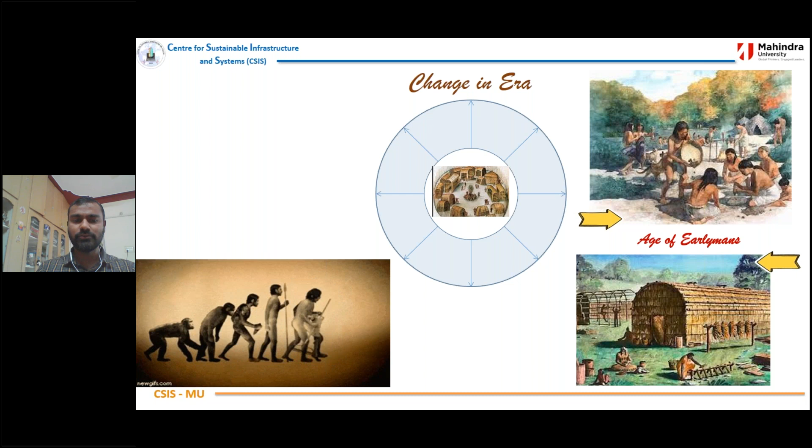It all started from the early man, where people moved from place to place to get their food, called nomadic life. Suddenly they started to live in caves wherever there was a natural formation of houses. But over the period of time, they stopped the nomadic life and settled in one place. That's where civil engineering has come into the picture.

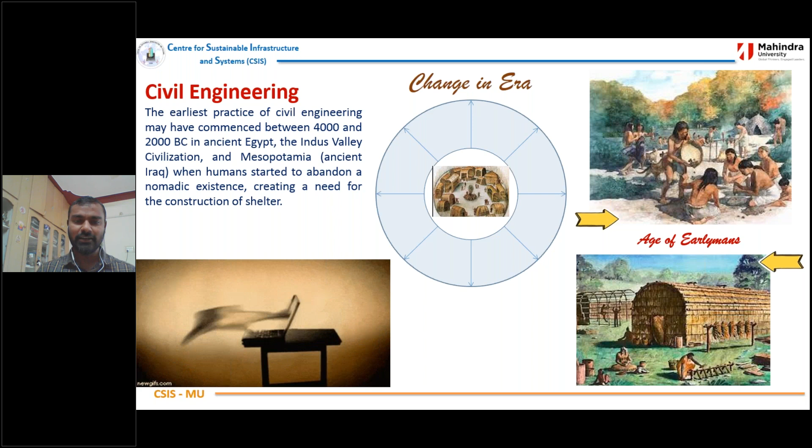The earliest practice of civil engineering may have commenced between 4000 and 2000 BC in ancient Egypt, which is more than 6000 years from now. There were certain civilizations like Egypt, Indus, and Mesopotamia, where people abandoned nomadic life and started settling down, even building their communities. That's where the whole of civil engineering started, when they began to build something for their life.

The history of civil engineering is a mirror of the history of human beings on this earth. The engineering shows exactly how human beings have evolved over the period of time. This is a couple of engineering examples used thousands of years back.

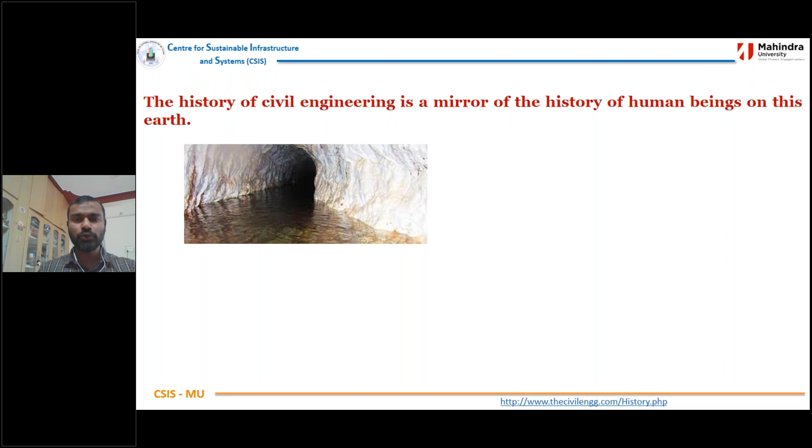This is called the Qanat water management system, seen in Persia, Iran, Iraq, where there is a scarcity of water. They dug a tunnel horizontally, as you see in the image, and then had wells vertically down—a horizontal tunnel which has water in it, and vertical wells used for removing the water. This was used way back, 3000 BC. The length of this Qanat water management system is approximately 70 kilometers, maybe more. This is not the only place where they found this system, but a couple of other places as well.

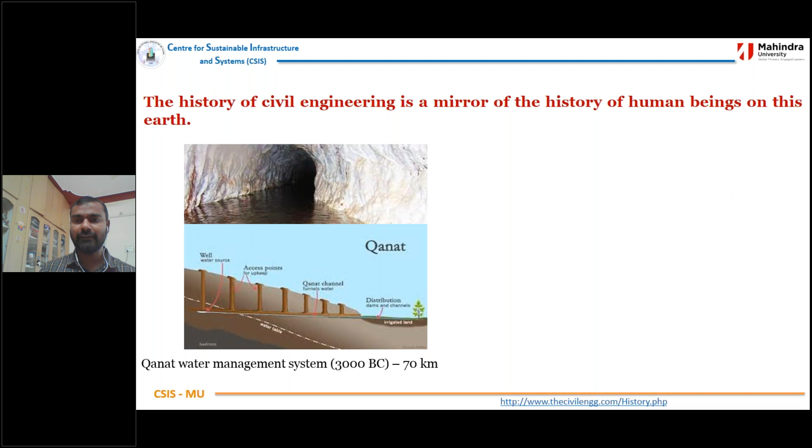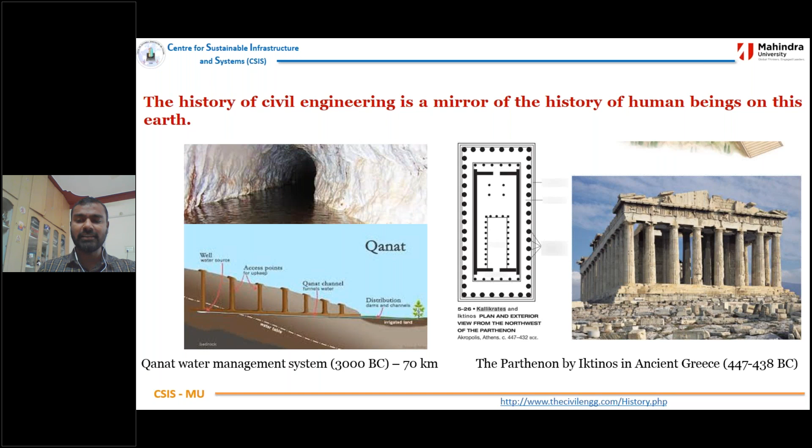And then the Parthenon, it's in ancient Greece. What we see is columns and beams and architecture, and mammoth structures all making a huge structure, with the locking mechanism and everything. This talks about simple physics, gravity, and the designs and stability of the structure.

That has largely been used and seen in Greece in mammoth structures. Coming to 312 BC, Roman engineers also used pathways like this, stone blocks laid for a pathway, and these stone blocks of pathway are even seen today, showing their longer life. Like the Indus civilization, said to be one of the first civilizations to have a brick pathway, Roman civil engineers had this rock pathway. They had longer durability in age, especially the stone structures.

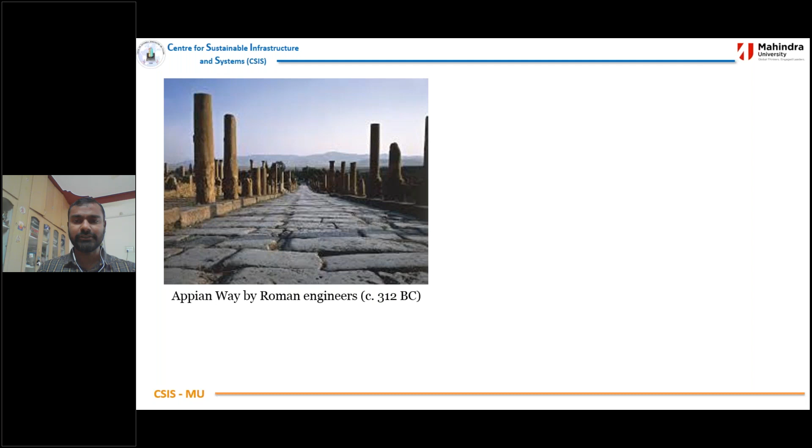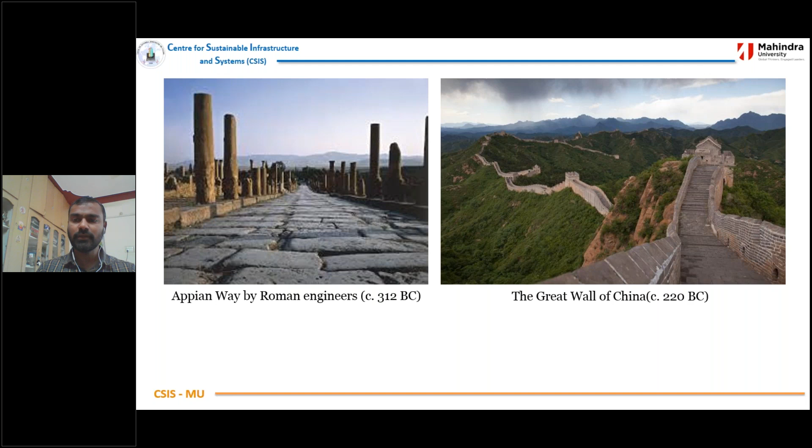And then the Great Wall of China, from 220 BC. This is one of the longest walls, built with bricks and stones, and they also used lime and gypsum as a binding material between the walls. If you see the clear picture, at the bottom part we can see the binding material, which is not cement but is like cement—gypsum and lime, which are very natural.

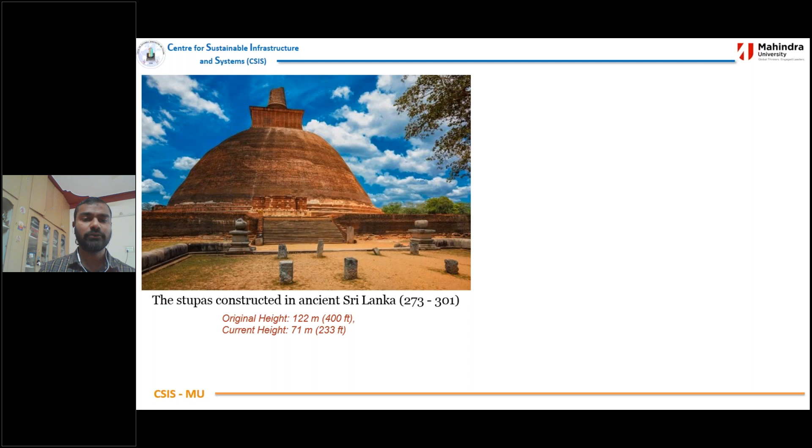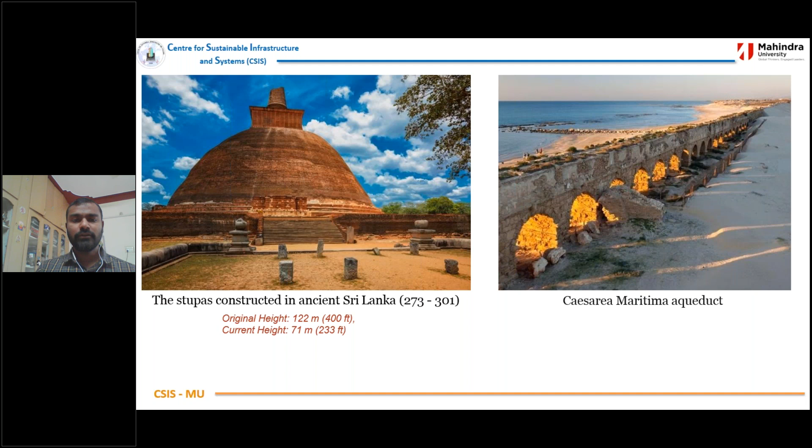And then this is an aqueduct. Aqueducts for water control, either from oceans or rivers, were used in the Roman civilization during the Caesar era. So what I am trying to tell you is how this engineering has developed in building mammoth structures, and how they actually used water systems.

These were largely two things discussed in the past few slides, and this picture talks about Machu Picchu in Peru, built in 1450. This talks about the development of a society at the topmost part of a hill. It's said this is the Inca Empire, also built in the Andes Mountains.

One of the best parts of this society and civilization was that it had indigenous water sources. Water was used, and they had perennial water all year round, even though they were on top—one of the best parts. They had one of the best systems for building houses and their kingdom with stones and other natural materials, and they also used wood. Second, they had the best water management system.

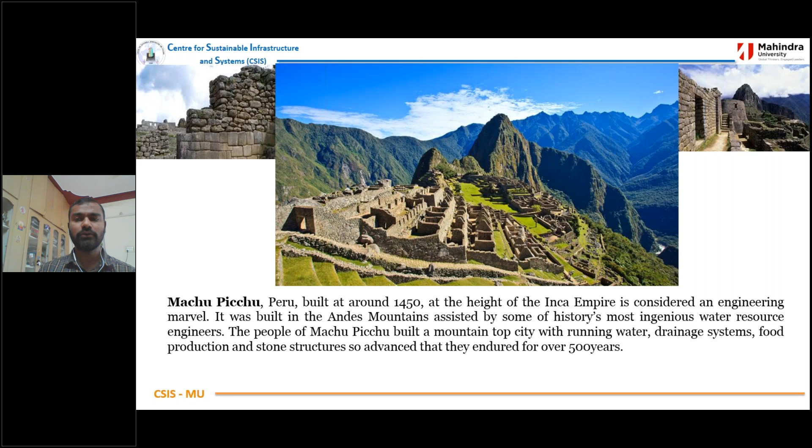In Machu Picchu, apart from drinking water, they also had a sewage line, which shows they understood how to treat the waste released by the society. This is the building of society. So these two pictures show us how the basement and the top part using stones were used to build structures. And of course, we also classify these ages into bronze and silver.

If we see the clear picture in this slide, they talk about very natural materials used for construction. In some places, the first picture shows dry grass and mud used for construction on the top left; the middle shows leaves and wood for construction; and the right corner shows slightly more advanced treated wood and a little glass. The bottom part shows houses built with mud, complete wood, and stones.

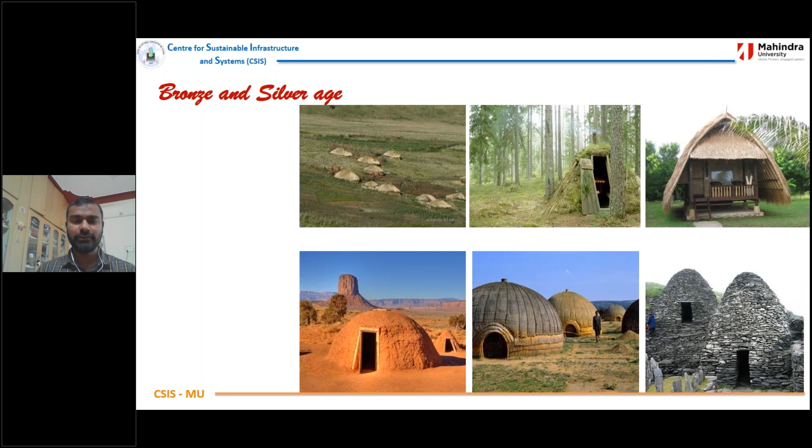All these are based especially on local materials, which today are largely called sustainable materials, and they don't release any kind of pollution, whether air, water, or earthen. These are the three pollutions we check even today—so there is no air pollution, no water pollution, and no earthen pollution for this. This is based on the Bronze Age solution.

And then we have Mayan, Egyptian, and Roman civilizations. You can see the Egyptian pyramids, one of the most stable structures in geometry, along with Mayan civilization and Roman civilization. What can be observed in this slide is that the designs are very unique in their own way.

Few are pyramidal in shape, circular in shape, then tapered in shape. So they all are very different in their nature, which actually says that geographically, these civilizations have evolved based on their local environment, geographical reasons, and natural materials, which has given an evolution of geometries.

And all these geometries actually withstood natural calamities like earthquakes, floods, and anything, apart from human disasters like war. And then there's a skill.

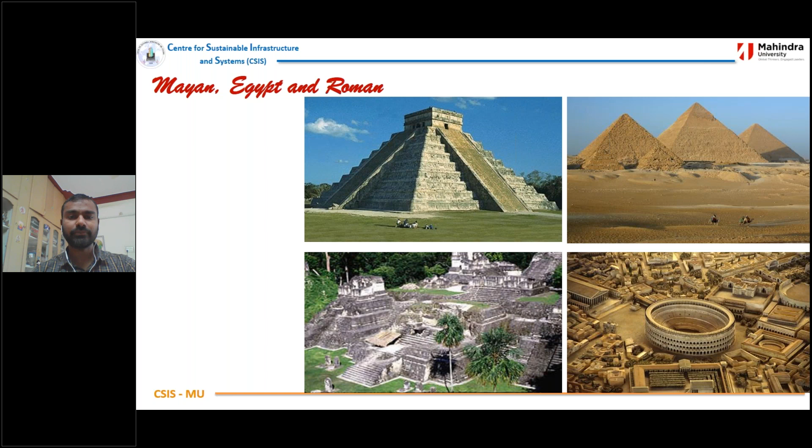We can see very precise skill of religious places like temples. We can see stones placed in locking mechanism, and we can also see temples built with one stone. There are various kinds of structures which were built, showing a marvelous skill in their engineering.

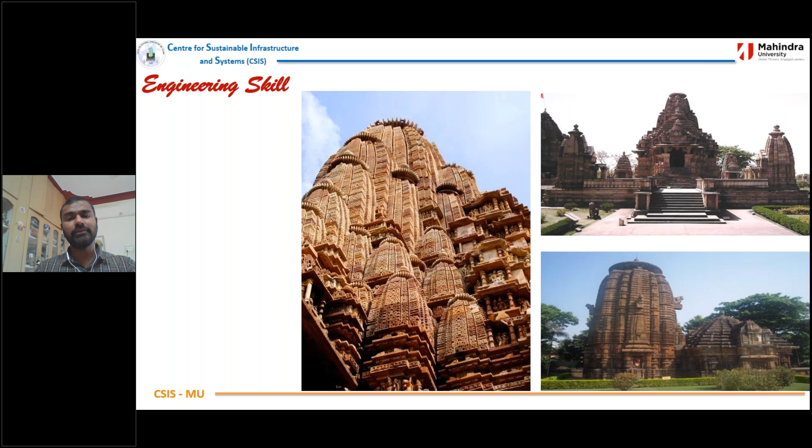This geometry is not just evolved like that, but it also speaks about the stability of these structures. As we see, the shape decreases or tapers as it goes up, and this can withstand floods, as well as even wind and earthquake. So these structures had geometry, stability, and resistance toward other natural disasters.

For most of us, history is still a secret, and we are still trying to see what is the mystery behind a lot of historical structures. It's not exactly a secret, but it's an open secret. Most people know that there was a contradiction between religion and science, and people were executed, so the secrets were kept in another form.

So when there was a difference between science and religion, all the information was kept in the form of a portrait, largely built with mechanics, also as a treasure of something. So when I read about the history of mechanics, I did read about Leonardo da Vinci. He portrayed certain images consisting of simple mechanics for constructing very large, mammoth structures.

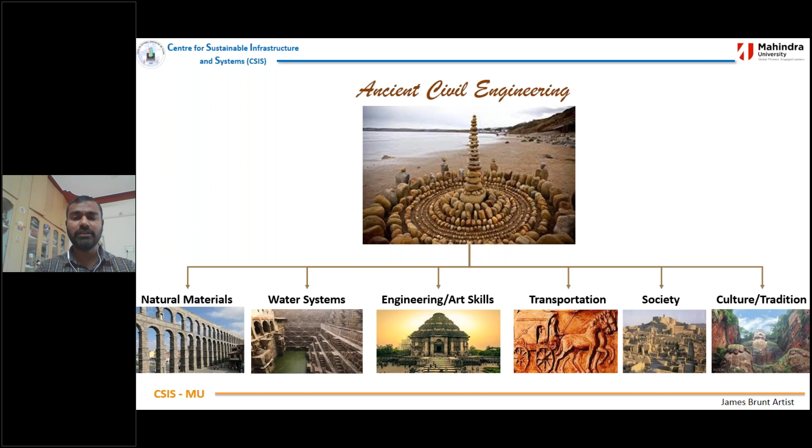And the last point is that all these structures show some kind of culture or tradition in them. So this is what ancient civil engineering is, and if you can see, all of this actually relates to modern civil engineering as well. The current civil engineering, which I'll talk about, is all about space — how to utilize space.

Air is all about how you take care of wind forces, or how structures are designed for wind circulation. Fire is nothing but heat control in structures, and then there's water and earth.

So for modern civil engineering, if anybody types it into Google, there's a simple definition: in modern usage, civil engineering is a broad field of engineering that deals with planning, construction, and maintenance. These three are very important — planning, construction, and maintenance of fixed structures or public works, which are largely government structures.

As they are related to earth, water, or civilization and their processes, civil engineering talks about planning, construction, maintenance, and all about the five elements, and how they are integrated to come up with fixed or public structures.

Civil engineers are always working in shaping the world as we live today. The whole world structure is largely believed to be designed by architects and civil engineers, though this is changing a little now. Examples include building roads, railways, bridges, canals, skyscrapers, factories, etc. These days, modern civil engineering is also focusing on aesthetic and environmental impact, which is where the term sustainability engineering comes in.

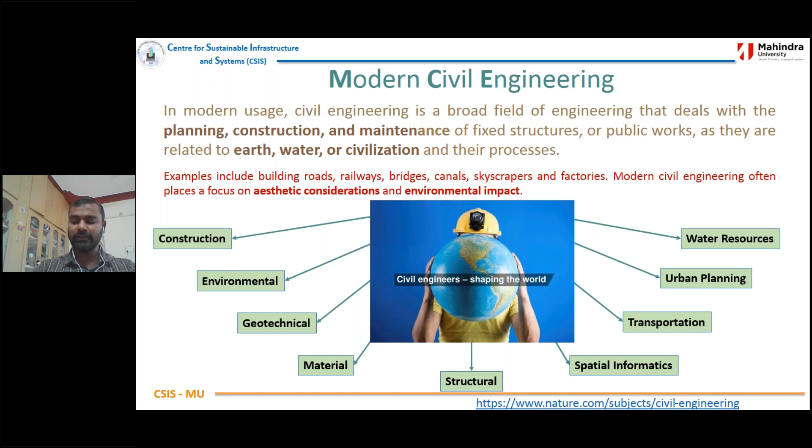If you're traveling from Hyderabad airport into the city via the outer ring road, you can see a number of vertical cranes working on multi-storied structures, ranging from 15 stories to almost 40-50 story structures. At least hundreds of cranes are working along that road building these tall structures. These cranes have actually changed the fate of the skyline of the city itself, making work easier and faster.

This is the crane, and second, this is construction in China. A very similar equipment was also used in L&T Hyderabad for moving a girder from one pier to another—you can see the movement of the girder using a huge mechanical equipment vehicle. This has made the construction of bridges much easier. It works on a cantilever concept, if you know what a cantilever is in civil engineering, and this makes the work faster.

Unlike previously, where we used a lot of scaffolding and shuttering, a lot of groundwork can now be avoided with this larger equipment. But it has to be done very carefully, because a single accident can cause a huge disaster.

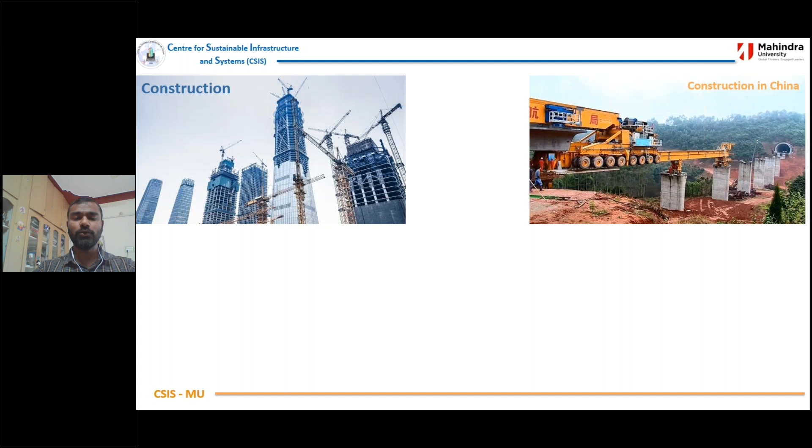This is the Millau Bridge in France, which can withstand very harsh environments. One reason I included this bridge is that it represents modern-day bridges—it's one of the tallest, and the material used is so substantial. They've used lots of tons of steel and concrete so that it resists extreme weather, including snow and high temperatures. It's one of the tallest bridges seen in France.

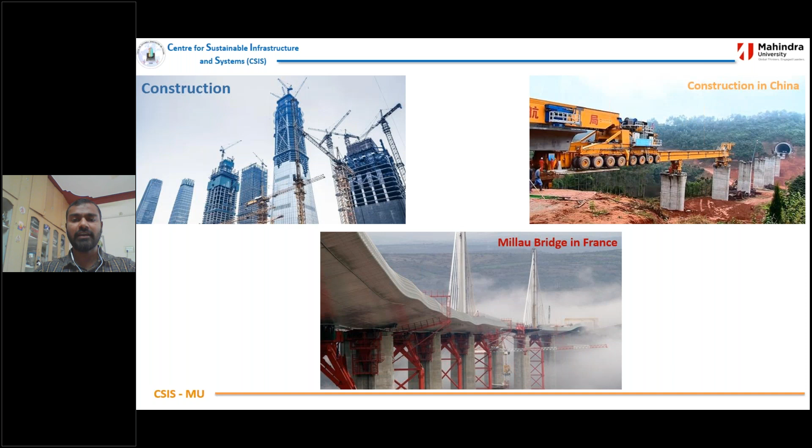In continuation, this is the Chenab Bridge, which Indian Northern Railway is building—in fact, it's almost done. It's the world's highest rail bridge, built by Indian Railways to connect Kashmir to the rest of India by 2021. Very recently, we attended a seminar at the National Academy of Construction where they said the bridge is almost done. It will decrease the transportation journey by about 300 to 326 kilometers, and the total length of the bridge is 1.3 kilometers.

This is the tallest bridge, with a height of 359 meters. In terms of material, it uses 25,000 metric tons of steel—that's really huge—and it has to withstand a wind velocity of 220 kilometers per hour. When Hyderabad had winds of 150 kilometers per hour, we saw a lot of billboard and advertisement board failures. So 220 kilometers per hour is very, very high. Of course, there's a speed limit allowing 100 kilometers per hour, even though it's designed for 120 to 140 kilometers per hour.

So this is the Chenab Bridge. When we compare it to the Eiffel Tower, one of the tallest steel towers in the world at 324 meters, this bridge stands at 359 meters, making it one of the tallest bridges in the world. This is during its construction—they faced a lot of challenges while building it. It was not an easy task, but it's almost a done bridge now.

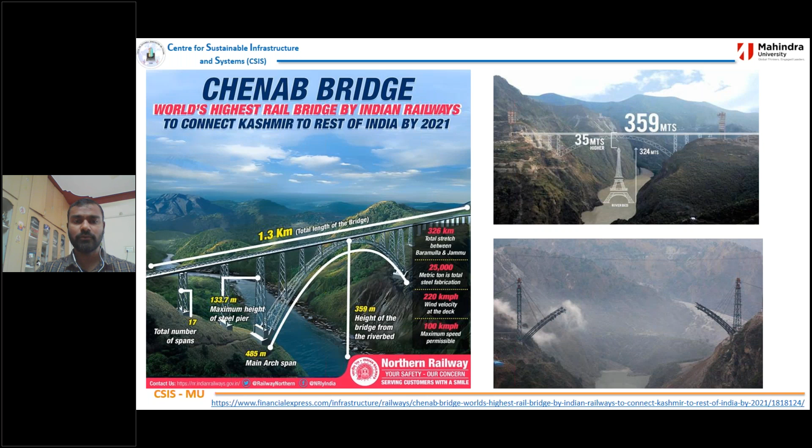And then environmental engineering or environmental sciences. Even though we have developed in multiple fields and multiple dimensions of engineering and sciences, we still face one of the biggest problems, environmental pollution. Right now, I would like to limit my presentation only to the civil engineering perspective.

There is an article in the Guardian last year which says concrete is the most destructive material on earth, even though there was a previous article in 2017 that said concrete is the most versatile and usable material for construction. In 2019, this has actually become a destructive material. Why has that happened?

We all know any material which is used for a limited purpose, up to a certain limit, is absolutely fine, like plastic. Once it starts crossing the threshold, it causes a lot of environmental pollution. Now concrete has become that. The concrete industry and usage of concrete has been releasing a lot of carbon dioxide into the environment, causing global environmental pollution, which has made this a very big issue to consider.

Of course, people are coming up with solutions like green structures or green buildings. I would like to talk about that in the last slide of this presentation, where I'll discuss green buildings or advanced buildings. So environmental engineering is one area. Environment does not only restrict itself to air, but also consists of earth, water, and sound pollution as well. All these are read about in today's engineering.

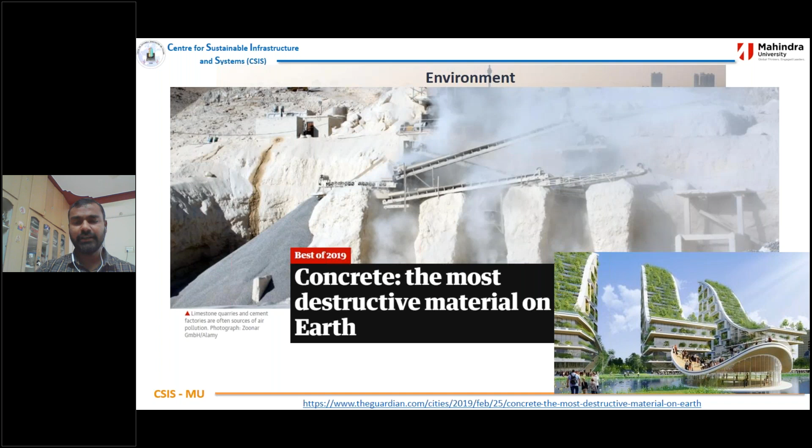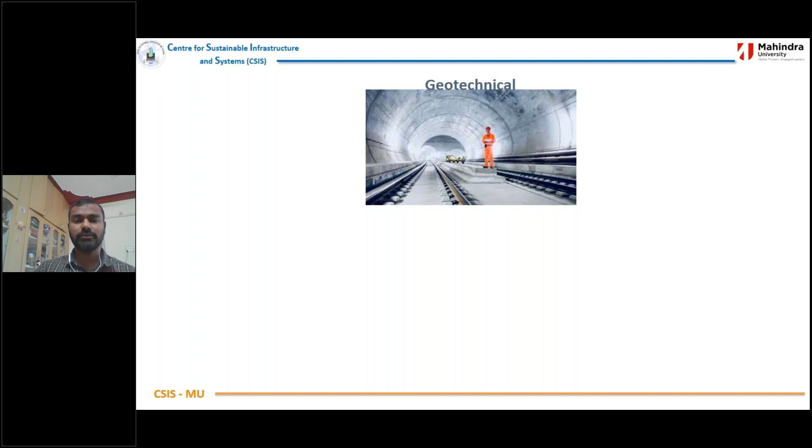And then with diamond cutters, the things are much faster. Simultaneously, we can cut the tunnel and also make the concrete lining on the tunnel, making it one of the much faster tunneling systems in the world.

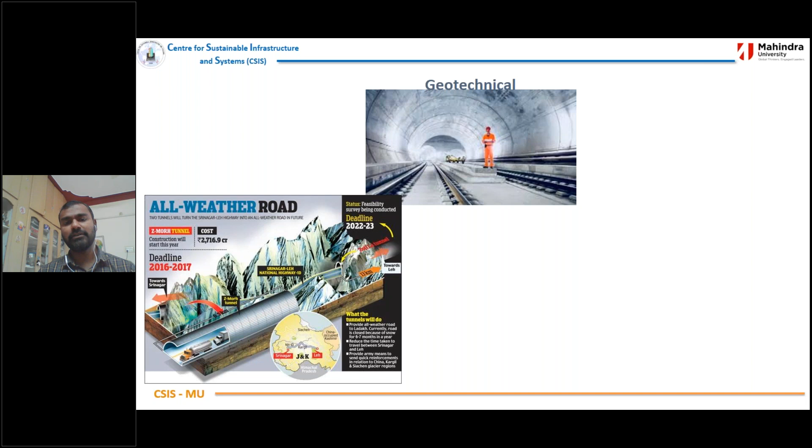This is one of the tunnels being laid in Jammu and Kashmir, connecting Leh and Srinagar, which is about to open in 2022. Things have started to move, and whatever current engineering practices are there have made civil engineering works much faster, precise, and a little more robust. And then this is soil stability.

Even though it looks like a very small area, slope failures have become one of the bigger problems, especially on hilly terrains. If you talk about India, then its northern part or northeastern part have slope failures. In fact, there were slope failures two days back because of the floods.

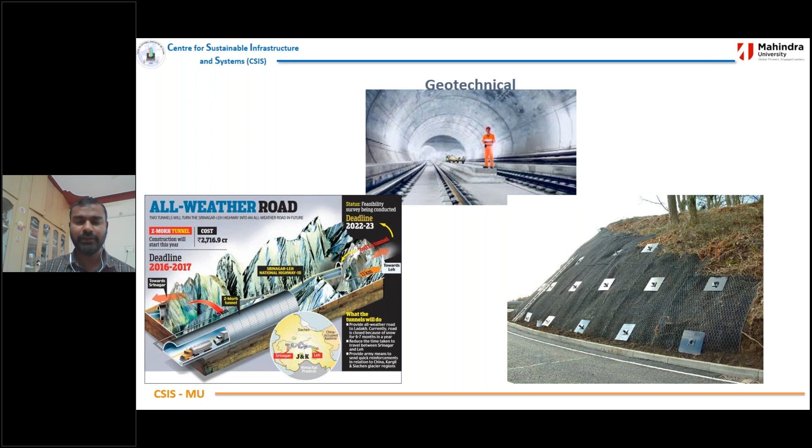The floods actually weaken the soil and cause slope failures, and this happened in Meghalaya near the Shillong region. Of course, there were no fatalities, but it is assumed to be one of the large landslides and slopes that has occurred after a few years.

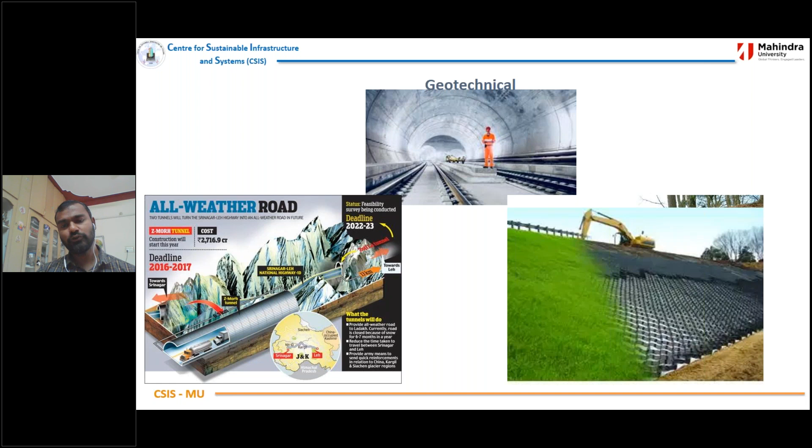And then these slopes, with current technology using fiber and geosynthetics, are being converted into greenery by providing hexagon-shaped synthetics and then having grass grow on it. So geotechnical engineering has also gone a lot farther in this area.

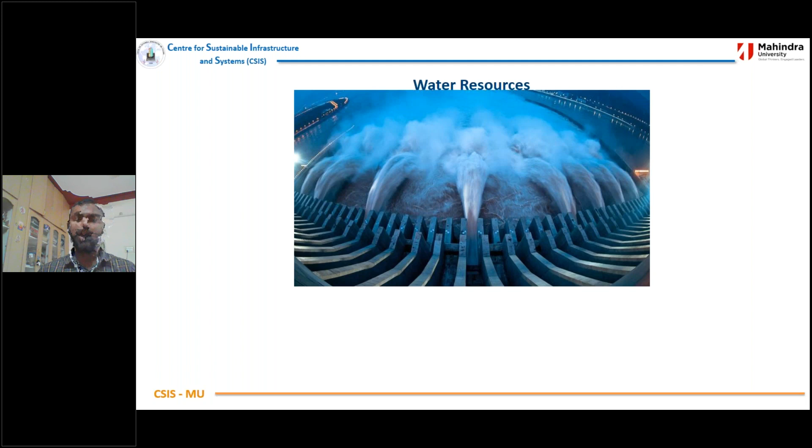Water resources, for me, is about where we can get water, how do we store this water, and how do we use this water. So water resources and fluid mechanics - everything we try to understand about how we get water, how we use water effectively, and whether we are actually trying to treat water.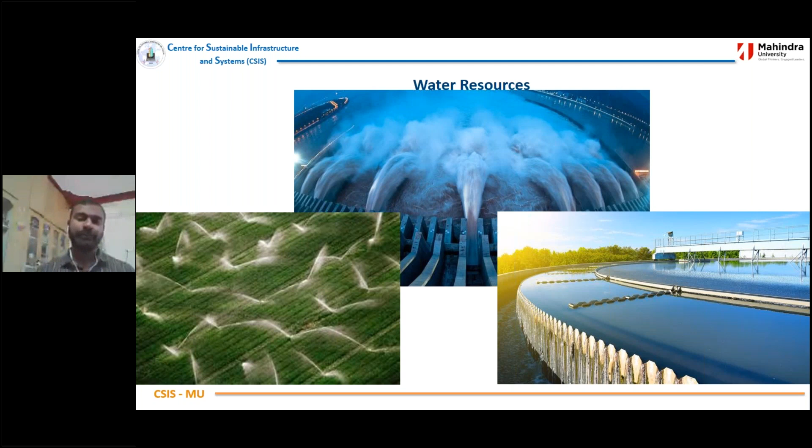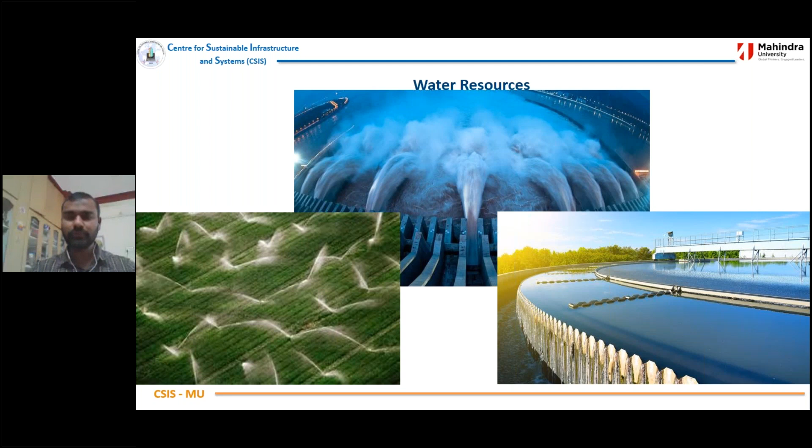And then spatial informatics - this is also an area we are improving. Once spatial informatics came into the picture of civil engineering, a lot of things changed. Now we see the city in terms of layers.

Apart from that, this is also helping in today's cabs.

GPS uses the global positioning system to find your location. It'll exactly give you the time of reach from your starting point to your destination. This is spatial informatics in engineering.

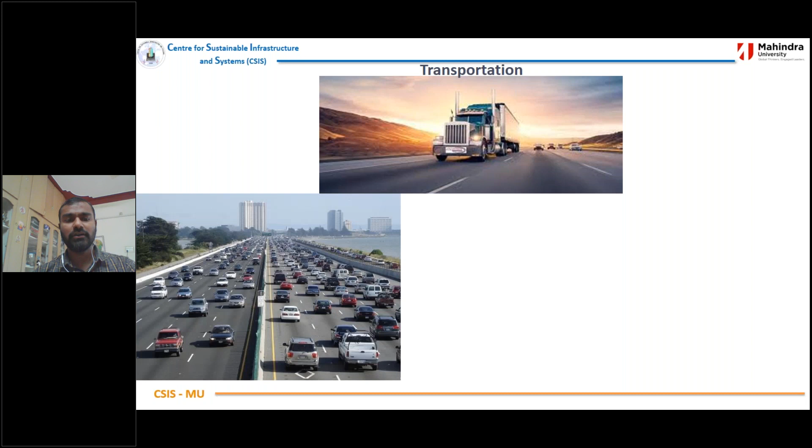And transportation, of course, all around the world we've been very successful in building one of the broadest roads the world has ever seen, and also one of the most complicated interchanges in the world. This is Singapore's interchange. Similarly, there are a lot of interchanges all around the world. Very few, like Hong Kong, Japan, Singapore, and Mumbai, have such complicated interchanges.

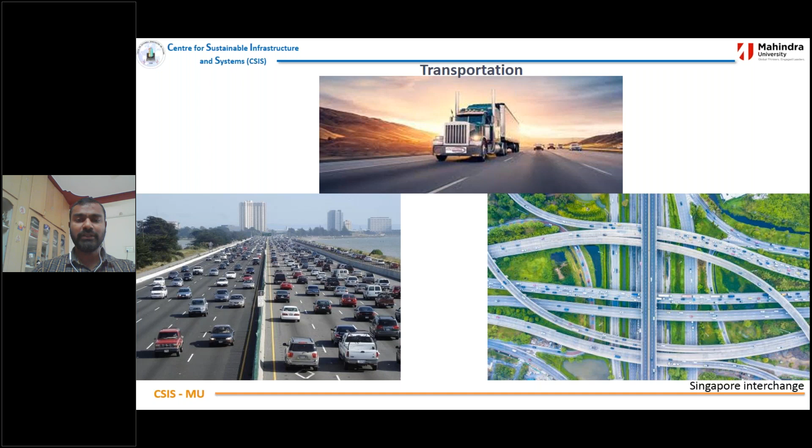Symbols and signals help us in reaching the destination, but when we miss one, it takes kilometers of road. But then, yes, we have the big transport system.

Urban planning - this is Barcelona's car-free superblocks, where there are series of houses. This is one of the ways urban planning is how we are replanning the growth and control of cities. It's still a challenge these days.

This is called gated communities. This picture is taken from Hyderabad. Gated communities are societies with a capacity of 3,000 to 25,000 people. We even have bigger communities of 1 lakh, where we try to manage everything inside the community. So smaller communities mean better management with this tag. Communities are trying to build these gated communities for better management.

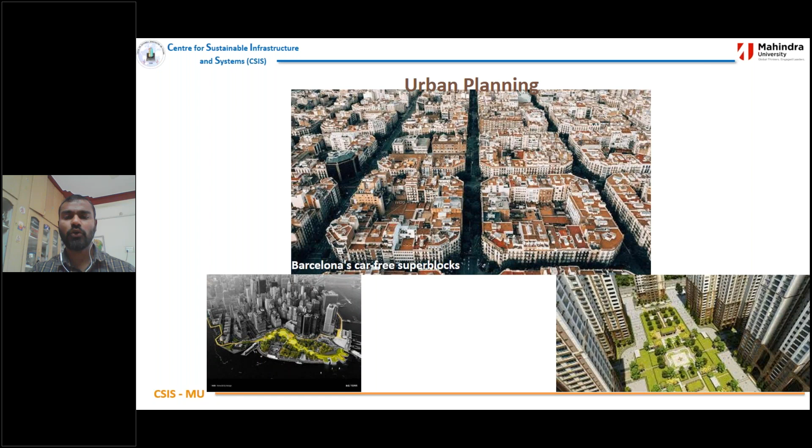But still we have certain things. This is the left side - what you see is how do we manage water in these communities, or how do we manage water in the growing cities? That's still a big challenge for us. And then, what is lacking? This picture is only for small awareness, and I'll add answers to these pictures.

Even though we have the broader roads, there's still a bigger problem of traffic congestion. We have the best education system, but yet we have traffic congestion. Why is this? That's the question mark.

And then it makes things even worse when we have floods. In fact, just a couple of days back we could see a lot of floods all over India. And then, even during the pandemic, there's still a lot of congestion on the roads. This makes it really a disaster.

Even this is not only in developing countries, it is also in developed countries. You can see how the traffic is being managed - there's no systematic order in this traffic. It's going to take hours, from morning till evening, until this traffic congestion gets cleared up. So there's still a problem in it. Even though modernly we have all kinds of engineering and the best of technology, we still lack these things.

Now this is a very big U-turn, as you can see in the right side picture. You can just guess how much time it's going to take when all these vehicles move up a U-turn while the other lane comes in straight. So these things are still promising challenges for current civil engineers.

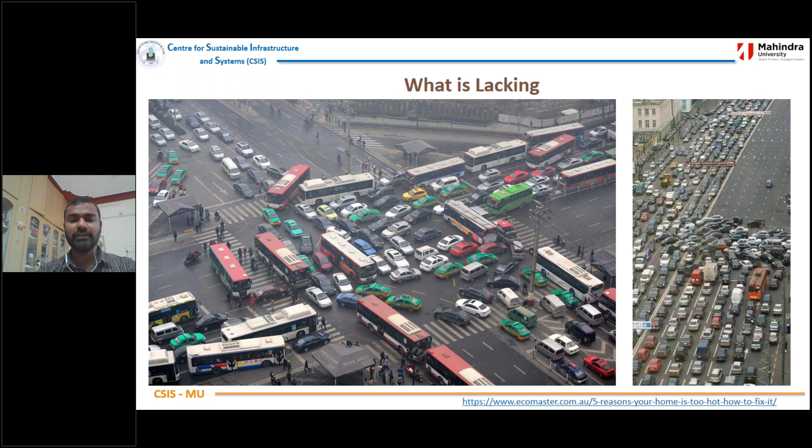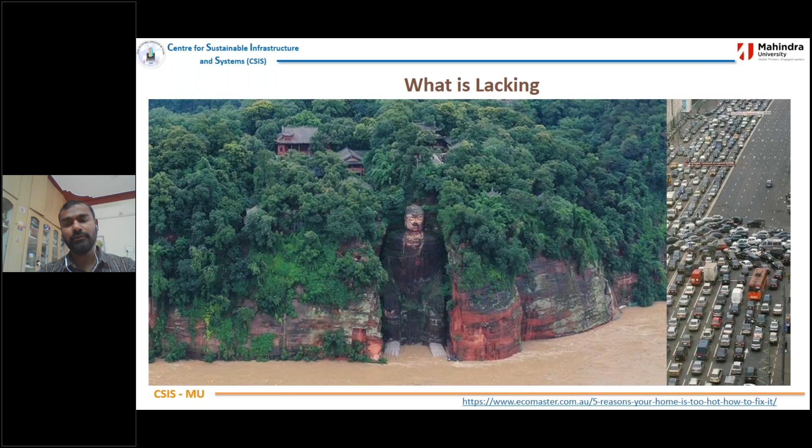This is cultural and traditional - this is from yesterday. This is in China, one of the religious structures, built way back. Now there's a flood affecting it. Still we are not able to predict the flood and its height, and we're still poor in managing floods.

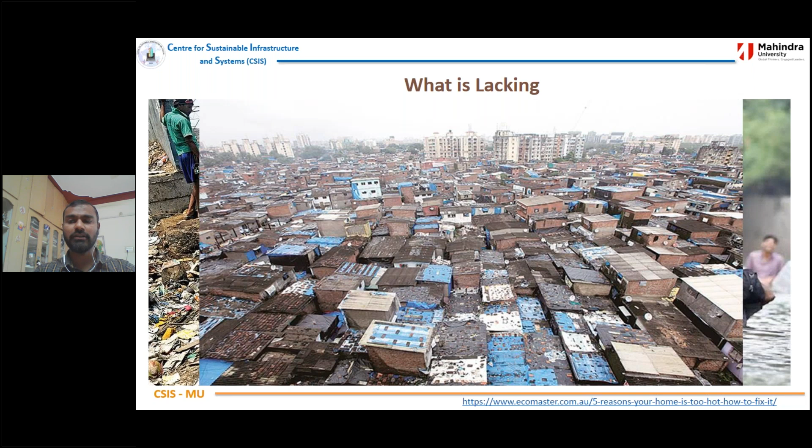With all this, I talked about ancient knowledge of natural materials, sustainable materials, water systems, sewage cleaning, and everything. And suddenly everything was lost because of wars, and the knowledge disappeared. Then we tried to rebuild all the knowledge, and we did build it, but suddenly we still face a lot of problems. The question is, where are we going, what is really lacking, and how do we get rid of all this? So this has led to a lot of solutions.

In summer it's really hot in our houses, and we are using cement, and cement makes buildings much more hotter. So how do we solve all these problems? This is where we started. Civil engineering right now has taken a very big revolution, and technology is really adding for that revolution in a very big way.

Civil engineering right now is not independent by itself. It has been added by a lot of other fields to change into a different shape. Largely civil engineering is known to have a cap, papers, pencils, and drafting, a lot of these things. But then in civil engineering, all these are removed and replaced with something called building information model.

Even though like 17% of the world right now is using building information model, this actually helps in digitizing the complete building from the scratch to the complete maintenance of the structure. Very good improvement, very good addition to civil engineering.

Right now, anyone who does a specialization in construction management in advanced colleges, building information model is one thing which students take up and are part of. Very developed countries like Singapore, Japan, USA, European countries, including a couple of buildings in India, have been using building information model, and they have seen that usage of this has reduced a lot of miscommunications between different parts or different parties in the construction.

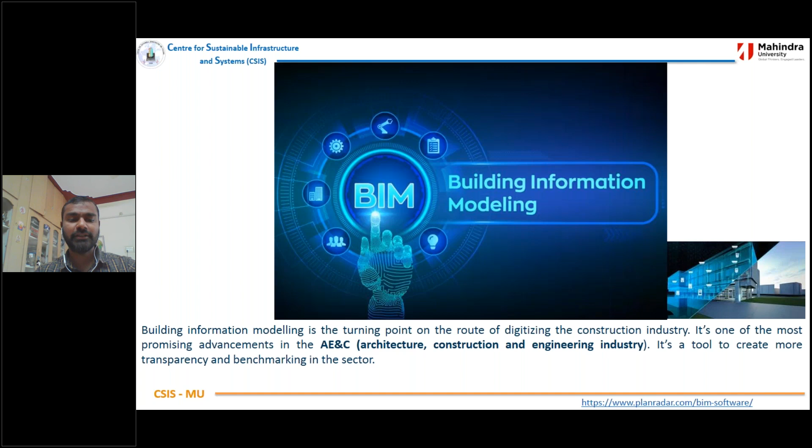Building information model is a turning point in the route of digitizing the construction industry. It's one of the most promising advancements in the architecture, construction, and engineering industry. It's a tool to create more transparency and benchmarking in the sector, which has actually evolved.

So what does it do? It does the coordination between different parties, so that what is lacking in one is known by another. So architecture, civil engineering, the plumber, the electrician, the interior designer and the owner, everyone is involved in this, and they can see what is really happening at every point of the structure.

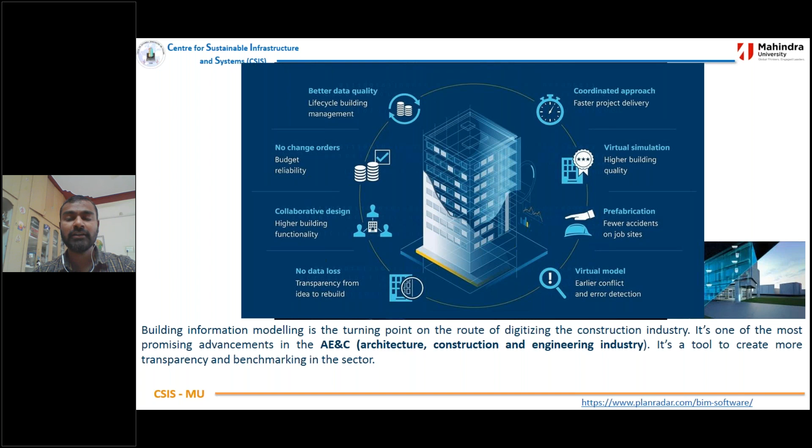Immediately we can know the drawbacks. We can also know why the work has been stopped, and we can see the virtual simulation, and then we can see how it looks with the interior design, everything. So this is a new generation - building information model, civil engineering combined with computer science.

Burj Khalifa is one of the nascent examples which has used complete building information model for its construction, and it also used wind calculations for this Burj Khalifa. Everything has been done using building information model for Burj Khalifa. Right now, it has got a number of sensors, and due to wind or earthquake, it will give us the alarm. So everything is digitized in Burj Khalifa.

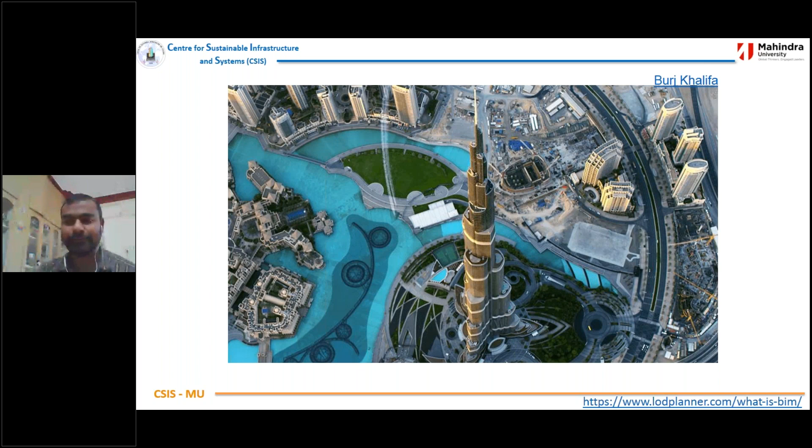And with a mobile or a system, we can control a lot of things in that structure. Again, it connects computer science, electronics, mechanical, and civil engineering. Now, once that is digitized, I know a lot of students these days, especially in the last 4 to 5 years, with the development of phones, are able to switch on and switch off the fans, heaters, motor, TV, air conditions, and everything. This is smart home.

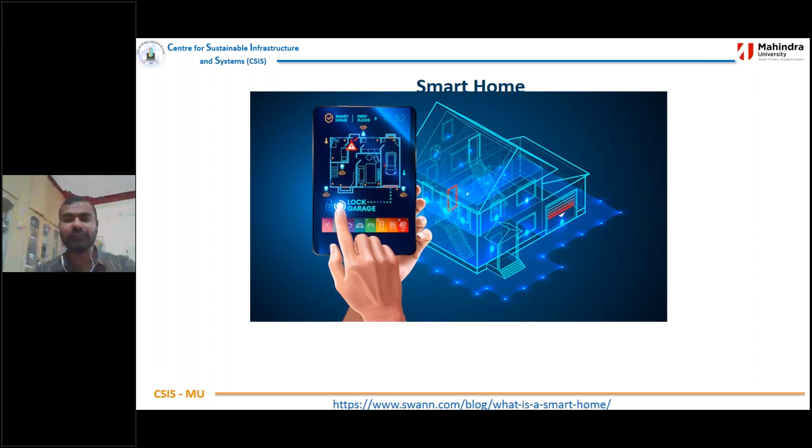With the advent of computer science and with a good knowledge of programming, the whole structure can be converted into a smart home, where everything is controlled by a simple gadget - your laptop or your cell phone. In fact, in our college, I have seen a couple of students actually use cell phones for switching on and off the AC and projectors. That's a very good thing when we actually miss the actual remote of those instruments.

So smart home is again trying to make things effective in terms of light, energy, and wind - everything is being optimized using smart homes, apart from its security benefits.

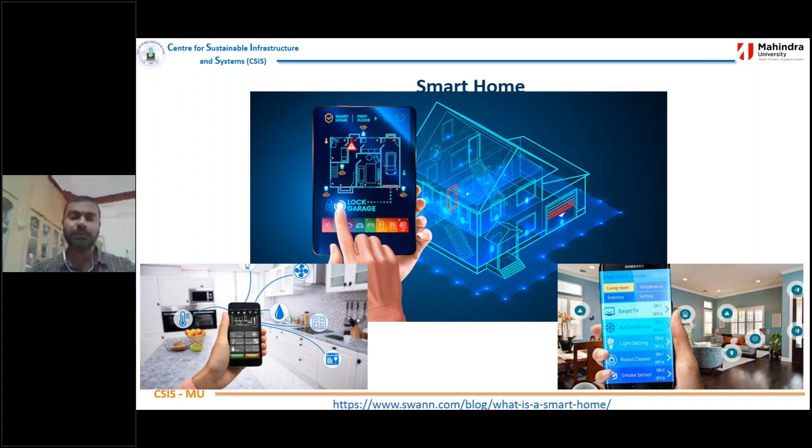And then another big thing which is coming up into the industry is called modular construction. Of course, I would like to keep it in small terms - anything like modular furniture, right now civil engineering has gotten into modular construction.

Even the biggest of the biggest bridges around the world are using modular construction, because it makes construction much faster, work is precise because everything is machine made, and things are a little more robust compared to manual construction. Of course, they have their own smaller limitations, because transportation from one place to another is a challenge, but that has been addressed because these panels can also be made in a small scale and grid, and they can be rearranged at the site. And they have seen the quality is exactly like in-situ construction.

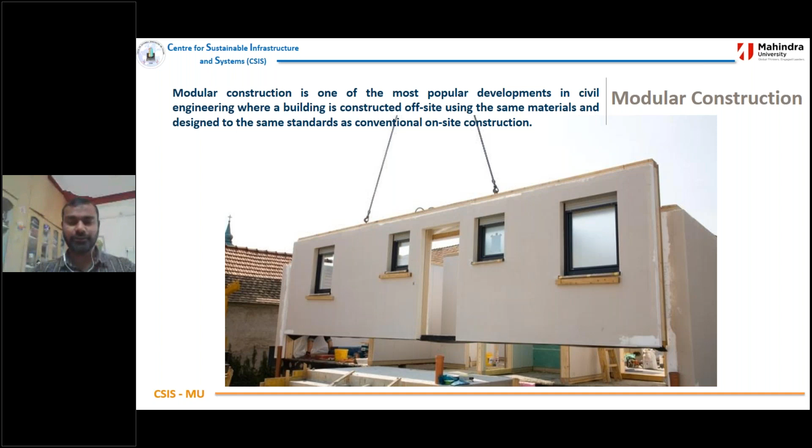One of the biggest problems we face right now in the world is plastic. I'd like to take up one example from Hyderabad itself, in 2018-2019. We had a person in our own campus named Prashant Lingam, who has taken a big initiative in our country in converting plastic into tiles and construction material. This was inaugurated in Gachibowli in 2018, and 950 plastic bags actually made one tile. So plastic can be converted into construction material, and we need construction durability of 100 years. All the plastic currently thrown at sewer lines or as waste is being segregated.

The only problem is segregation of this plastic. Once it's segregated, it's compressed at high temperature and converted into construction material. This is another new dimension of civil engineering, where we convert waste into construction material, decreasing environmental pollution.

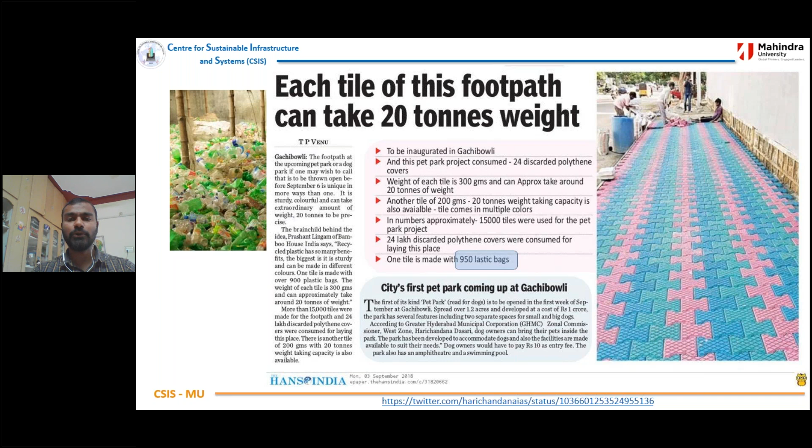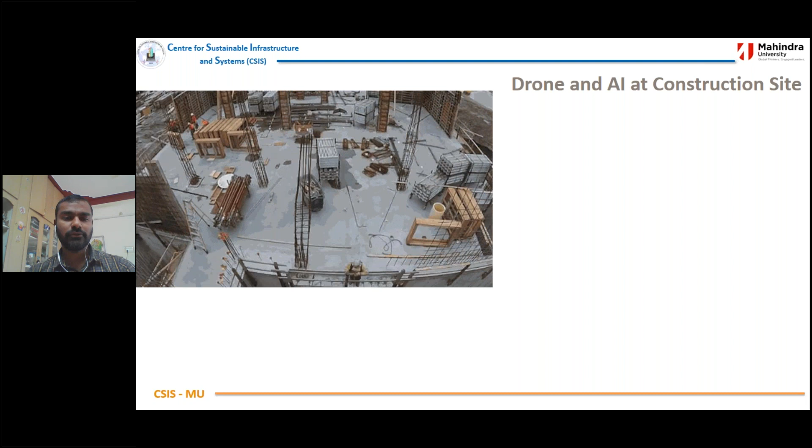Then drones. We are also currently using drones for building inspection, for structural health assessment as well as inspection during construction.

And then AI, artificial intelligence. I was very lucky to have one of my colleagues, Ms. Profula, who has been helping us understand AI in assessment and these things. We're also trying to use AI for railways, where a camera will be fitted to the railway engine, and it can detect possible defects in railway lines in the future. This is in the process of development.

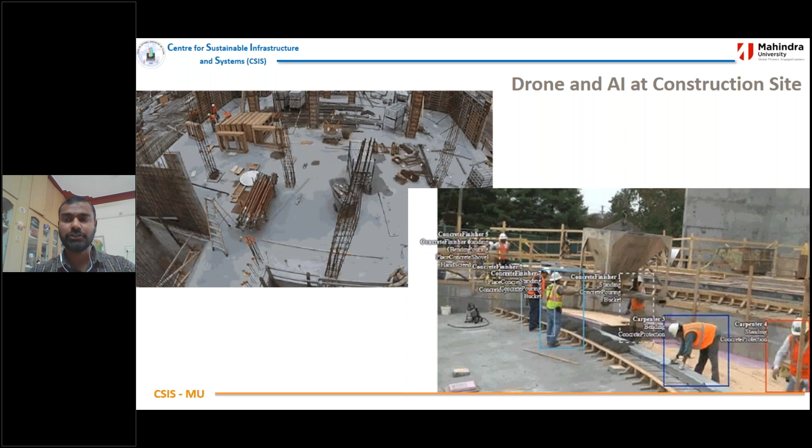This AI tells the number of persons working and what a person is doing. Based on the color of their jackets, it tells how many engineers, laborers, and professionals there were, and how much construction management. Everything can be distinguished—carpenters, plumbers, engineers, laborers—easily with the help of drones and AI, or any other camera fitted into the structure. This is another new engineering and construction management tool for making things effective.

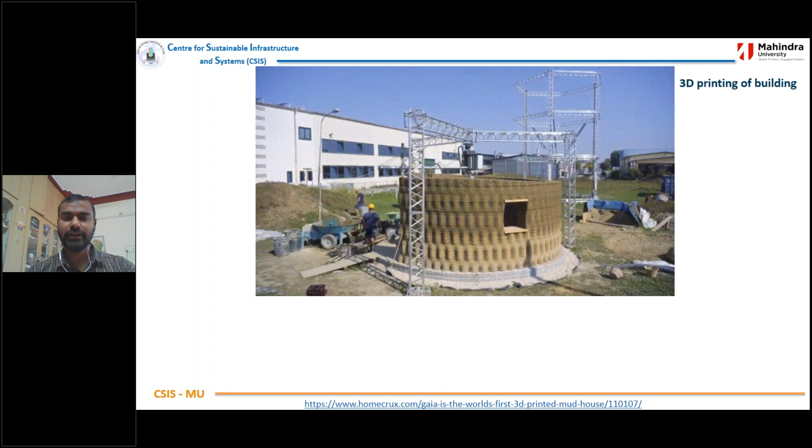Even in Mahindra University, Shiva, one of our mechanical and civil engineers, has combined with a team, and they have started to build a modular or 3D structure for economic reasons. This is the picture of the actually completed 3D building in Gaia. The bottom picture also shows a 3D printed building, another very well finished building.

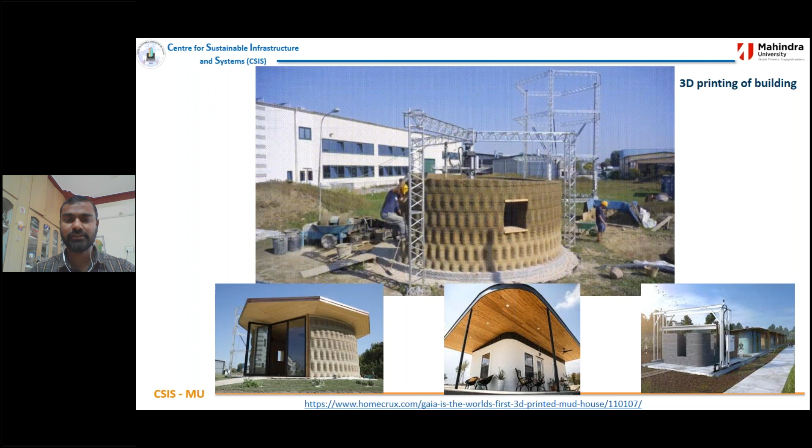This can also help in building row houses, and can actually eliminate slums in any country, especially ours. We need modular and 3D printing that can build houses and change the scenario of a slum over days, not years—maybe in a couple of weeks we can change the whole scenario of a slum area. I hope students can take up this engineering and change the fate of the country.

It can also take care of temperature and light, and can treat its own sewage within the same system. This is new engineering coming up in the next couple of years, within a decade for sure. So we're going to get green buildings, green societies, greater communities—green cities, green towns, or smart villages—where we'll have complete greenery vertically, with everything taken care of within that system. This is another solution for pollution.

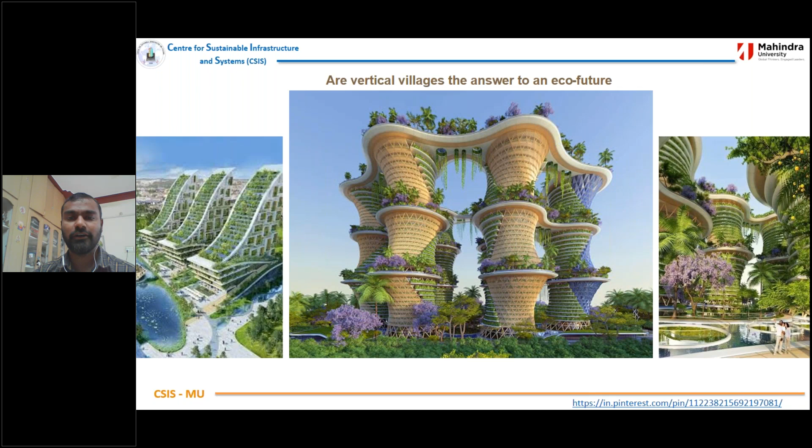And then architecture and nature, for structural stability.

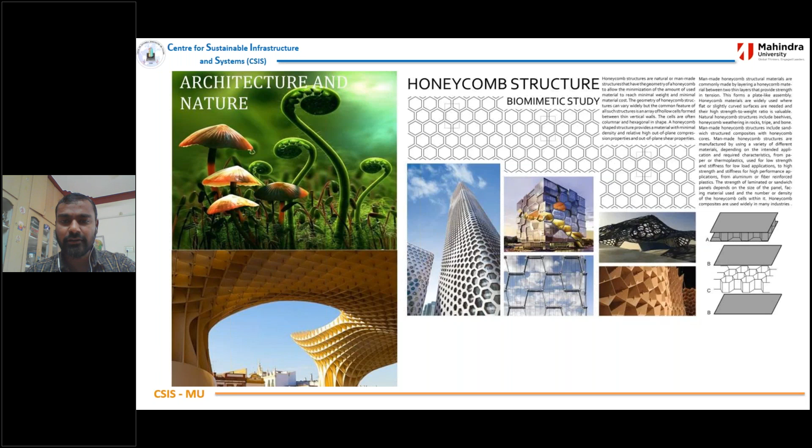One good thing about this structure is that it can actually take the humidity, convert the water, and do internal plantation or internal farming. So this is completely inspired from nature, is house farming. Right now we have terrace gardens and all. House farming is one good thing which is for the next generation to come up with. This will be part of civil engineering as agricultural engineering.

And of course there are various shapes which can restrict all natural disasters. So those geometrical shapes are actually designed from nature, from animals and plants. This is biomimetic engineering, which is a specialized part of civil engineering.

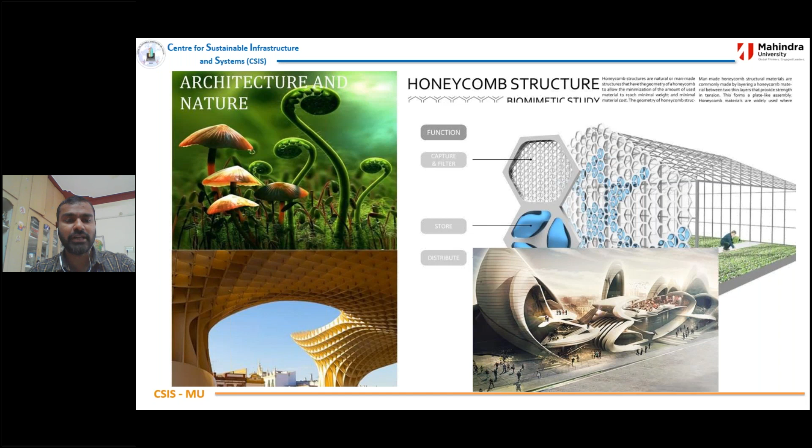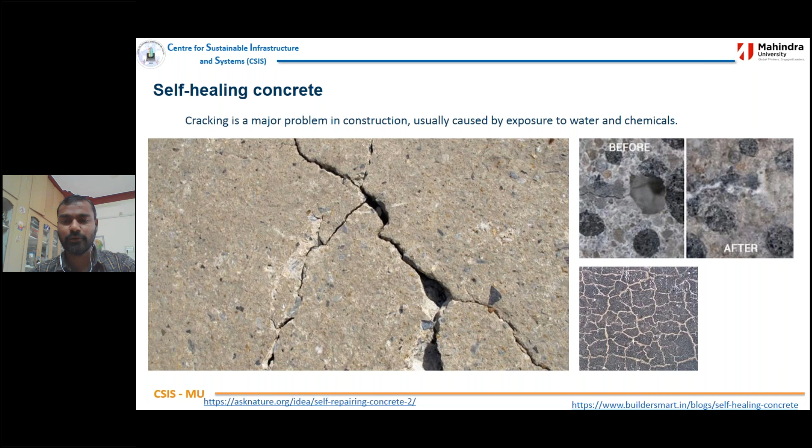This is repairable pavements, so self-repair pavements or self-repair walls. This is between chemistry and civil engineering. When chemistry and civil engineering come together excellently, we get such products called self-healing concrete. This was one of the BTech projects we've been doing at Mahindra University as well.

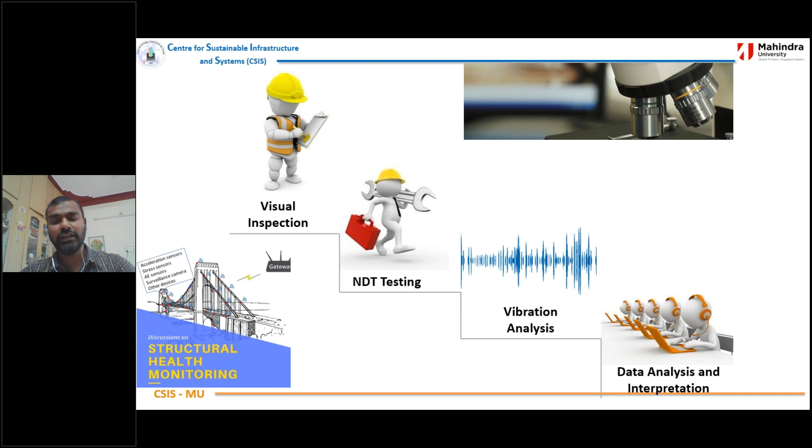I wanted to keep this picture because it consists of all the engineering fields within civil engineering that make structures feel alive. So all the bridges are being done with NDT testing and vibration sensors, and a lot of AI is used in interpreting this data and telling the health of the structures. This is advanced physics, like our professor, Dean Academics, is working on with photonics.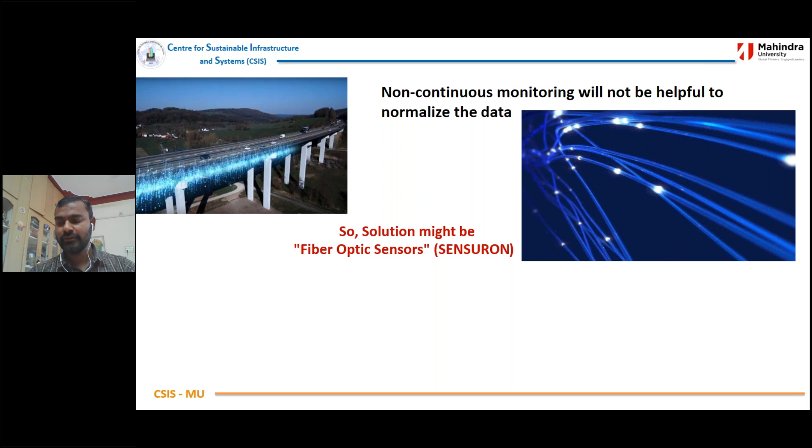And then this is something called fiber optic sensors. Fiber optic sensors are an advanced way of seeing structural health, and they also help us understand the traffic phenomena in urban cities. We try to understand how the traffic is distributed, when it's maximum, when it's minimum, and how we can plan for the future. These things are really helping in making the intelligent transport system as well.

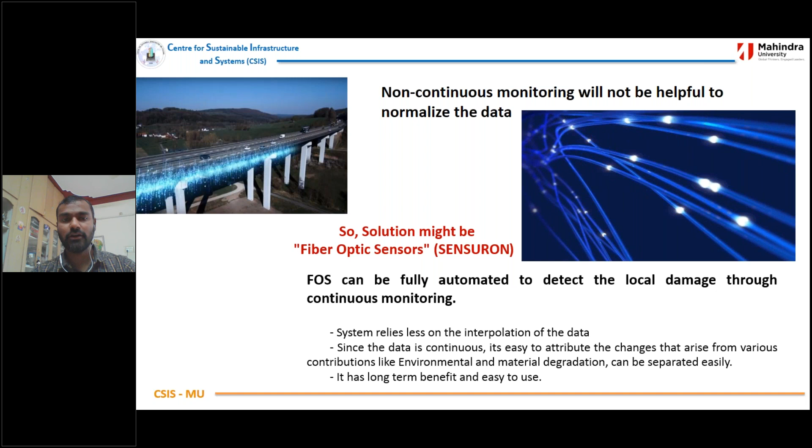So this is fully automated, and it can tell us where the damage is in the structure. This is the fastest way, and we can avoid a lot of structural failures, especially during floods. We can see a lot of structural failures - wall collapse, bridge collapse, building collapse - many things. But these sensors make a house smarter and also make it lively. We can call the building actually living because of these sensors.

And this is the intelligent transport system, smart transport. Right now all we are able to do is get the GPS data and see how much time it takes going from one place to another. But in future you will also be able to talk with your neighboring car or vehicle - you can actually request it whatever it says. This makes the system smarter.

Sensors will automatically calculate if two vehicles are going to collide or not, and tell the driver that at this speed, you will have a collision at 100 meters or 50 meters - they are going to predict that. So this is the advanced intelligent transport system which is going to come up, and it will help in reducing the number of accidents all over the year, especially in developing countries. It will also reduce traffic congestion, as vehicles can communicate with neighboring vehicles, and you can have an auto system which takes decisions by itself for optimized traffic conditions all around the world.

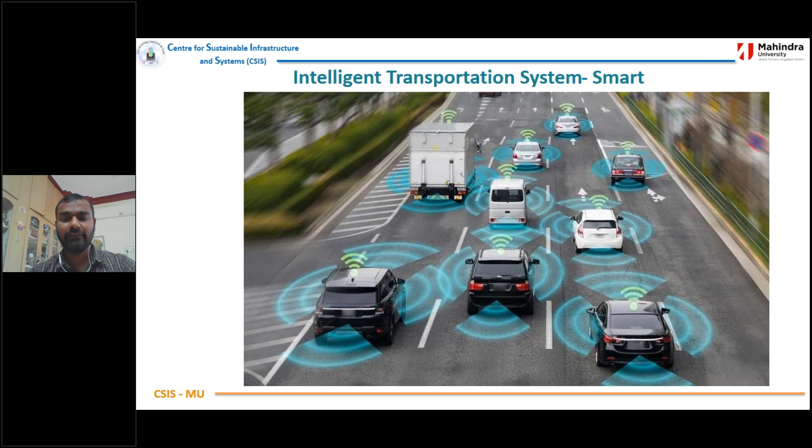This has already been developed, a prototype has been developed, and this is being used in a few locations in the world. I won't take much time. It's already 11:48, so let me close with two or three more slides.

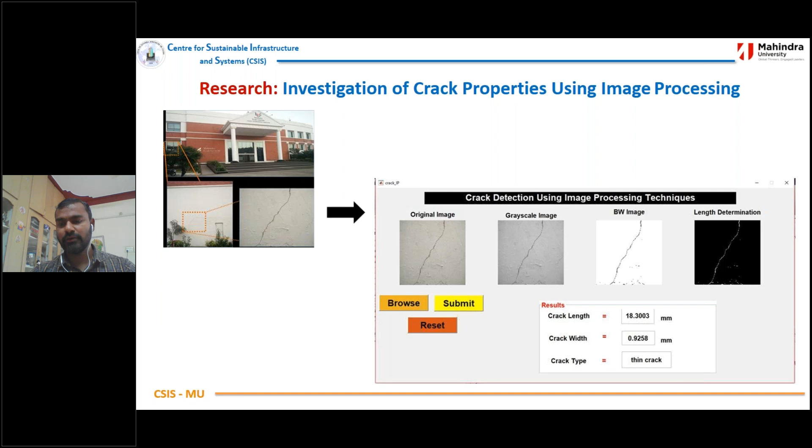We've been working on structural health monitoring, like cracks. Our own building had a couple of cracks, so we were actually trying to take images with a cell phone of a simple, very small wall crack, and then trying to understand the length and width using a camera. This was done by UG students with the guidance of my colleague Professor Prafulla, using image processing.

In continuation of that, we have an external student, Narsimha, who is working on artificial intelligence. Sushmita and Kirti, our own BTech third year students who did their internship in Korea, are actually working on advanced technology in detecting cracks using AI for structures.

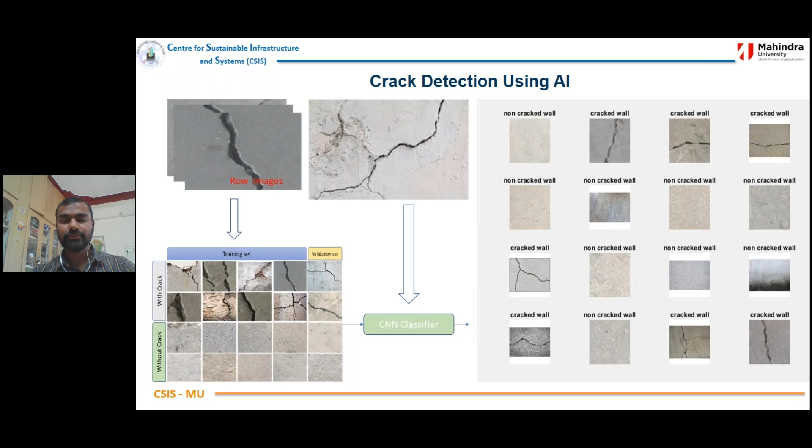In fact, it is not only crack detection. Since we've been visiting a lot of sites for structural health assessment, we have collected huge data, and all those structures had deterioration, cracks, spalling and other issues. Now AI has become a tool in saying whether the structure is healthy or not. All we have to do is send a drone to take images, or feed in images, and our system will tell the structural health. This is what we've been doing since the 2020 summer as well.

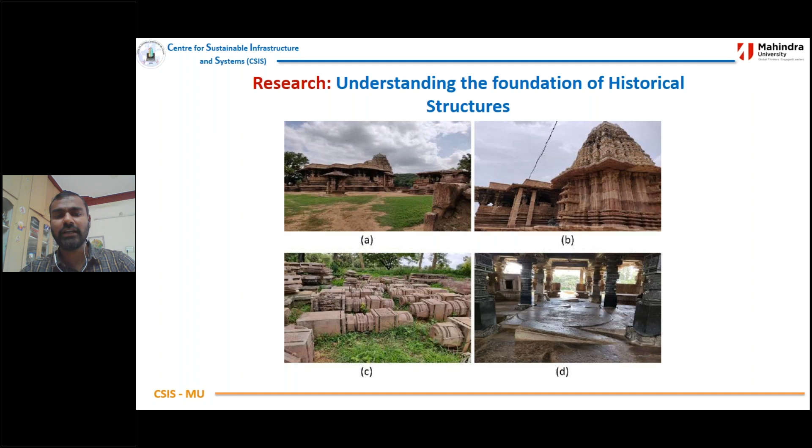I started my journey with the ancient, and I would like to end my presentation also with ancient culture. One of the most mysterious things right now in India, very difficult to tell, is what are the different types of foundations of these ancient structures.

We used sensors and developed a prototype of ancient sandbox technology, and we said that this could be the sandbox technology used for Ramappa temple, which has withstood floods and also earthquakes in 1957. This is an article published in New Indian Express about our research.

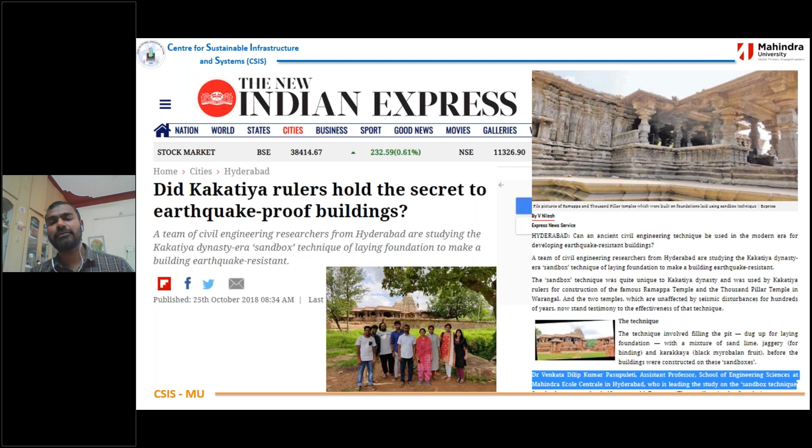There's a huge team, as I said: computer science faculty Professor Prafulla, Professor Bhargav, and also Professor Prasad, who were all helping in making this project, apart from our own BTech final year students at that point of time.

So what I was trying to say in this seminar is that a lot of engineering and science has been developed in ancient times, and right now in modern days we have technology, which is an added advantage. With technology, science and engineering, what we are trying to do now with the next future generation is add technologies like artificial intelligence, machine learning, image data analytics, coding and sensors into civil engineering, making more robust solutions for the defects we see today in society—pollution, whether plastic or water pollution, traffic congestion, structural failures, water problems, or soil problems.

All these are being connected right now into one big system of artificial intelligence and sensors, and we are able to solve those problems. So the future of civil engineering is going to be very interesting, because it's not going to be pure civil engineering. It's going to be a combination of engineerings to provide a very comfortable society for future generations.

So with this, I'd like to say that our journey into the next civil engineering has just begun, and it's going to be one of the most interesting engineerings one has ever imagined. All fields are actually trying to help civil engineering evolve into having one of the best societies in the world.